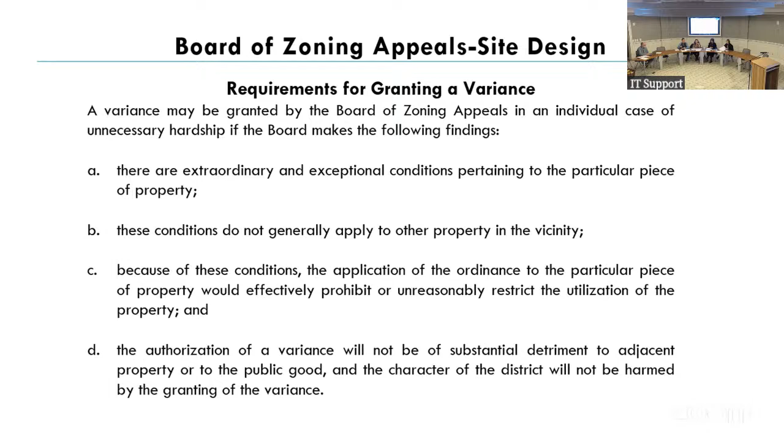So with that, we'll also mention that Amanda Barton has joined the meeting, so we now have our full quorum. We'll go to our first item, which is going to be item A1, review of the minutes for the September 4th. No, all right, sorry, November, wrong one there, I'm sorry. November 6th meeting. Any comments on that, or a motion for approval?

I make a motion for approval. Second. All right, so all in favor of approving the minutes from November 6th? Who seconded? Ruthie, you weren't present at the November 6th meeting, so I'll second. Yeah, so Amanda Barton. Okay, so all in favor? I'm in favor. In favor. In favor, so that passes 3-0.

And I believe we finally have our correct members here for the review of the minutes from February 7th. And I apologize, our admin snuck this one in because she has better memory than I do, so I don't have a slide prepared for that, but you have it in front of you. That's right, we know those minutes. So is there a motion on that?

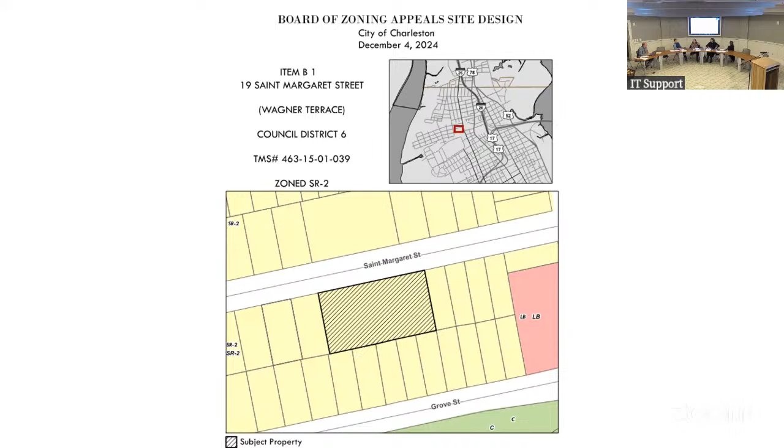This is what we would consider in an SR2 legal non-conforming situation. Obviously, it was the center for young women, and it's my understanding the building is going to be repurposed to a multi-family building, and it received Board of Zoning Appeals use variance to allow that to occur.

So here it is sitting on St. Margaret Street. As you know, it's a fairly large building with a little accessory structure to the west. Driveways to the east with a small parking area on the east side and a service area to the rear. This is just a street shot to remind you all if you haven't seen this structure in the past. Little brick seat wall raised.

So with the repurposing of the structure to multifamily, I'll let the applicant speak specifically on the number of units I think that the Board of Zoning Appeals permitted. They're going to have to park it.

So this shows an expanded parking area on the south side of the building and stretching to the west. As you can see, because it's less than an acre in size and zoned SR2, the ordinance is only going to protect the grand trees.

If the existing operators wanted to cut down non-grand trees, they would have the right to do so based on the base zoning. So we have 4, actually I think 5 grand trees, and number 8 and number 11 are the 2 that we'll be addressing tonight.

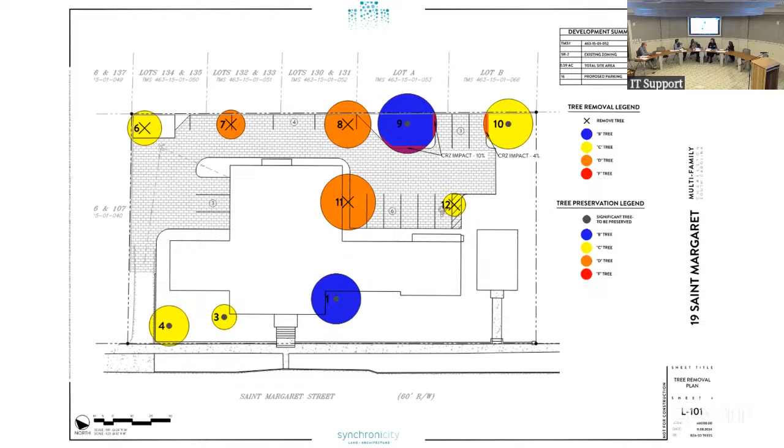I'm going to be able to work with the applicant and the project arborist. We've already studied reducing the aisle width, and with alternative construction methodologies we'll work to allow small encroachments.

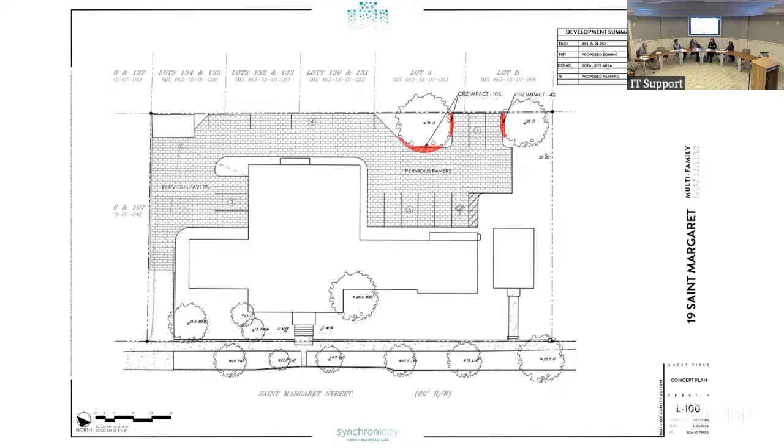So I did not require that to be advertised, but that just shows the 26 and the 31-inch oak, and there's a grand magnolia out front. Natural Directions created the initial tree evaluation report and is also carrying through some recommendations for the parking lot improvements.

So again, tree number 8 is a 24.5-inch willow oak, and tree 11 is a 14-15-inch live oak. Again, the plan for additional parking. So again, the 15-inch willow oak, grade D, that we can permit without board's approval.

But number 8, the 24.5-inch willow oak, grade D, and you'll see some photos that pertain to that. Included bark, small cavity, very strange branch connection.

And then the double stem live oak, I suspect is a volunteer. I don't think it was planted that close to the building. As you can see, there's the beginnings of maybe some structural damage to that brick foundation system. I think that portion of the building is on a slight crawl space. And then, of course, the crown that has been searching for sunlight stretched out.

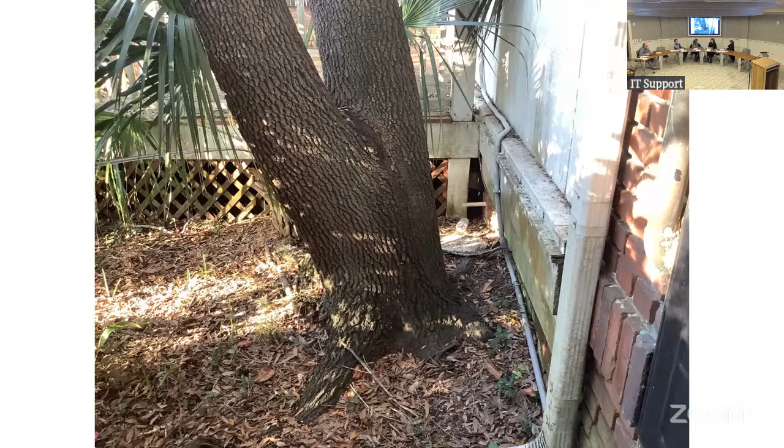So with that said, staff recommends approval with the conditions to plant 47 caliper inches of native canopy trees on the site. Obviously, we have large buildings, we have parking. We do have the opportunity, in my opinion, to plant 4 2.5-inch caliper trees and then make a contribution to the city street tree program in the amount of $4,130.

That's the remaining inches divided by the 2.5-inch tree that the city would buy and plant, at a cost of $295 per tree. Plus use a 4-foot chain link fence as tree protection barricades for the trees in the rear during the parking lot construction, installed by the project arborist. Must implement the certified arborist tree preservation plan, and then must submit a landscape plan for staff review and approval.

Excellent. Thank you, Eric. Is the applicant present? Yes, Mr. Chair.

Good evening. My name is Todd Richardson. I'm the landscape architect for the project, principal with Synchronicity at 69 Moore Street, Charleston, South Carolina.

So what we have for you tonight is an opportunity to help Florence Crittenton further their mission. They're in a very beautiful, but very historic and very much in need of building and site that not only does not meet their current program needs for the young mothers, but also is in need of a lot of repairs, and it's really going to become something that needs to be addressed. We're helping them set this up for the right group to come in and address this. This building will need several years of work, historic restoration and care. It is on the register, and SHPO will be involved. So there's a lot to be done after this.

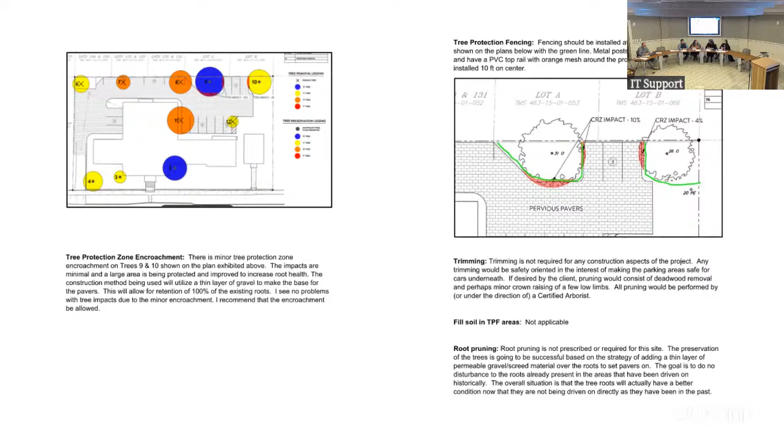I think it's a great mission. I think it's a great use of the property. We need small multifamily units. And I think it's a good solution. So I'm in favor of it.

Okay, I make a motion we move to approve the staff recommendation. Second. Who made the second? Paula? Yes, okay, so motion for approval of staff conditions, all in favor? Say aye. Aye. In favor, motion is approved 4-0.

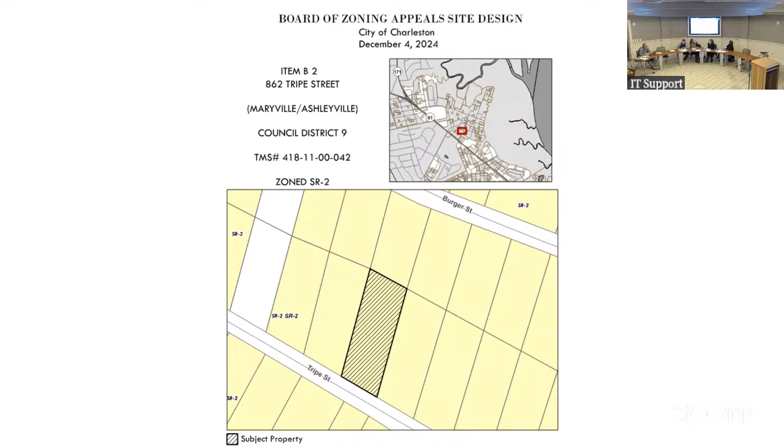862. You can see that it's a series of vacant lots. Couldn't tell you, there's a remnant driveway here and there, but I think I came across an old well of some sort, but they've been vacant for quite some time, overgrown.

We have large trees, some grand, some not classified as grand. You can see some very large sweet gum. The live oak that's in question is that small mound-ish looking tree in the center there, and you'll take a better look at it here in just a moment.

So the survey is this existing condition survey. They actually labeled it as a triple live oak. It's the one closest midway to the property line there. A very large red oak to the rear.

The site plan is to propose or build a house forward of the large red oak. However, this tree being the shape it is in, and/or the crown size, and then also you'll see in a moment the severe lean that it has. The third stem is a water oak, so I just circled that there to give you an idea. The parking would be out front, the house forward, very large rear yard.

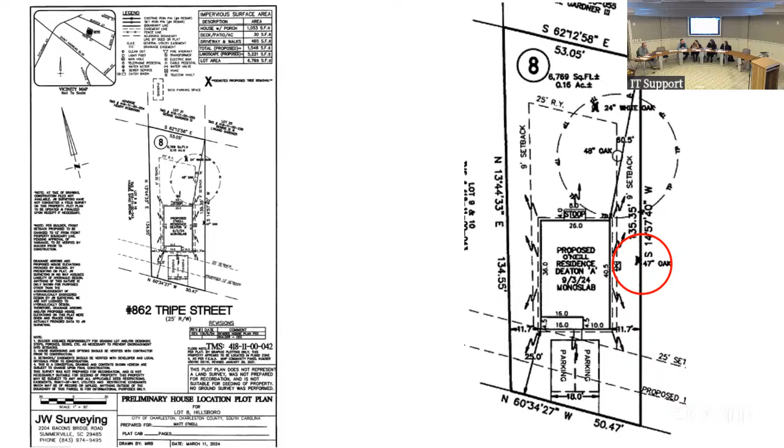Eric, what did you grade the tree? I would call it a D, with the double stem and the severe lean. The other oak is coming out of it. Right.

Just want to make sure. The first picture, standing back at the site, kind of says it all, with this little mound. If you were even to look and say, how do we trim back to be able to locate a structure on the property, all the major limbs are going toward where the house footprint would be.

Well, I'm happy that the red oak is staying for a change. Yeah, and it seems that the concept is to maybe maintain the other trees, so.

And those other two lots aren't going to come back with any removals, correct? I saw a house under construction to the left of this one and there were no trees on it. I own the lot to the right, at 860, and only the gums are going to be removed on that.

No trees are required to be removed. I like trees. I know another group bought the property to the left, but I'm not certain what they're doing. Yeah, there's a foundation going. Thank you.

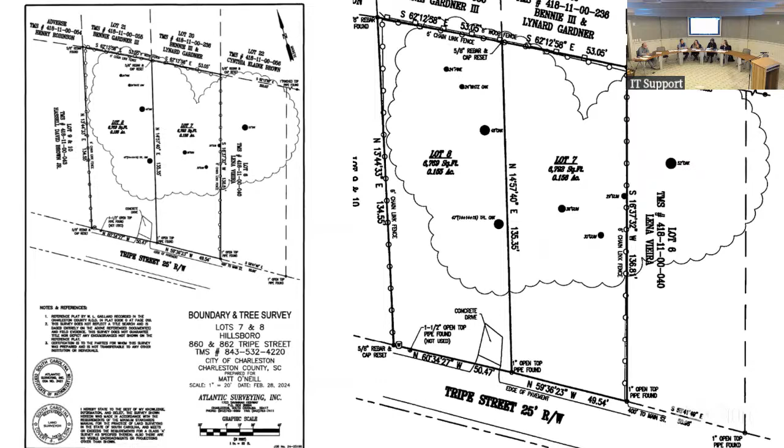I think it's a reasonable request. It's not some giant house being squeezed onto a tiny lot and clear cut. It's realistic.

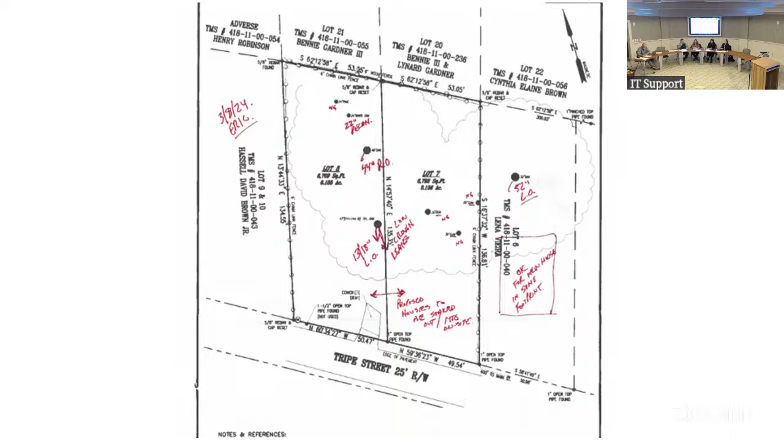I move to approve with staff recommendations. Second to the motion. Motion for approval with staff conditions by Ruthie, seconded by Amanda. All in favor? Aye. Motion is approved 4-0. Thank you for your time.

Our next item would be item B3, 84 Barre Street, TMS 457-02-04-001, zoned LB. Request for variance from section 54-327 to allow the removal of one protected tree.

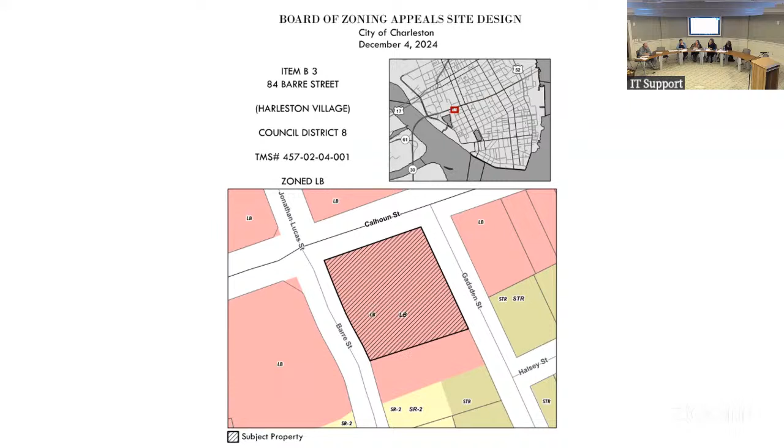West side of Calhoun Street, 84 Barre is the address. 76 Barre is the existing Ronald McDonald House facility. For justification, MUSC is planning to expand the Ronald McDonald House to provide more housing for patients, families, and others. You can see the lot line configuration today.

However, the county is going to— oh, here's the sole tree. There are palm trees, which can be easily relocated, but the sole live oak is there. There's a picture of it from the street survey. They use this lot today as valet parking.

So the county is in the design phase of enhancing the Courtney Calhoun Street corridor section, and it's going to move this far east. They're taking some of the existing MUSC lands to adjust the curb and help out with that southern lane on Calhoun Street. So they're getting pinched by some land taking, if you will. They're going to provide parking as much as they can on site.

And then the building is actually bridged. It's physically connected by a first floor, or a second floor I guess—first being ground, second floor bridge. So you can see the location of the tree is basically on the foundation. I believe that's where the bridge ties in right there too on the second floor.

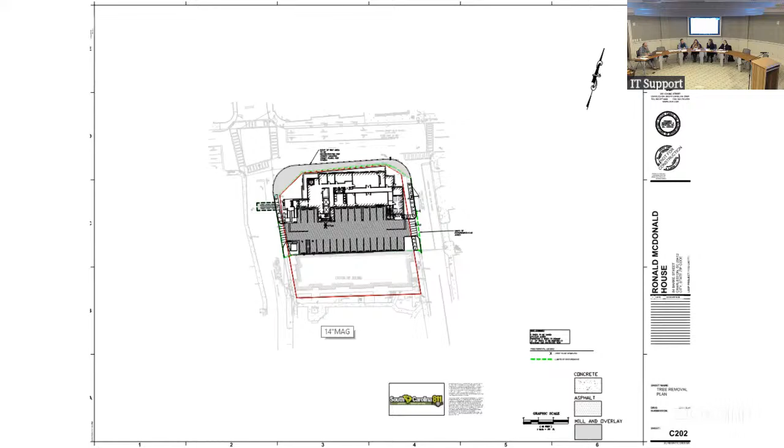So just to remind you, it's a surface parking lot today. Okay, thank you, that's helpful. So they'll have a building out on Calhoun Street, physically connected by a pedestrian bridge above the parking. Got it, okay, thank you. And so the parking that they can't fit on site now will just go across the way to the parking garage, I guess? That's correct—MUSC has a whole parking program and management division.

I think that the acquisition, the changing of the right of way, whatever it was—I think that's our hardship. And I would agree with that. And it's too big—well, I mean, technically the tree could be moved, but this is a nonprofit as such, so I think it's unreasonable to ask that. Yes, I make a motion to move to approve the staff recommendations.

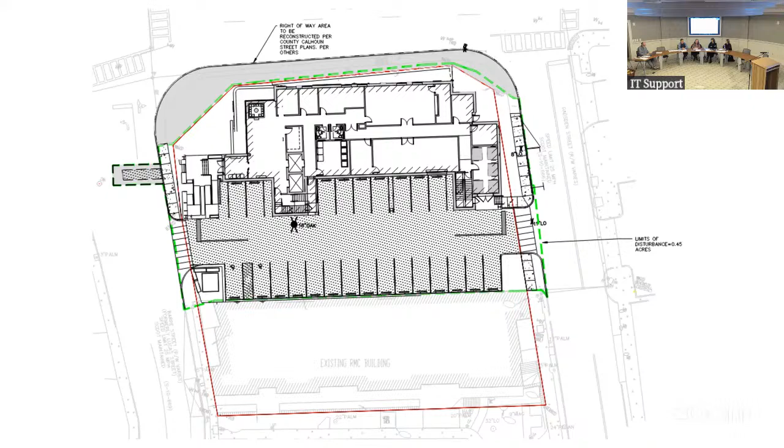Second. All right, so the motion's for approval with staff conditions by Amanda, seconded by Paula. All in favor? Aye. Any opposed? That motion's approved 4-0 as well. Thank you.

Okay, we'll go to item B4, which is 2205 Daniel Island Drive, TMS 275-11-02-001, zoned DIR. This is a request for a variance from section 54-327 to allow the removal of one grand tree. I believe we have a representative here; the owner is out of the country.

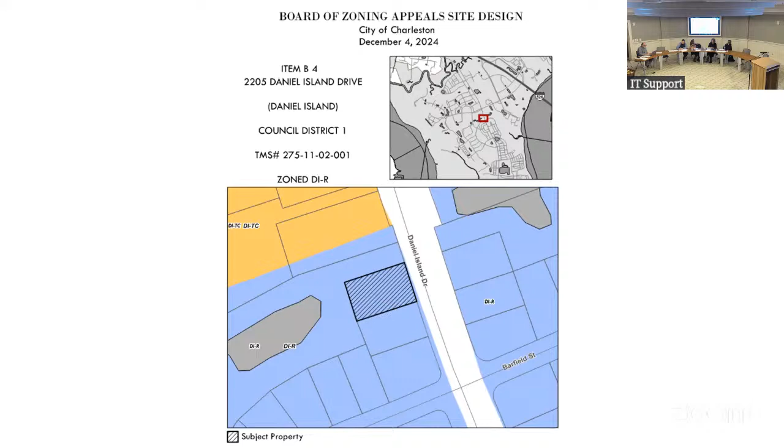This lot and the approval for this house goes back to 2005, you'll see those documents in just a second. It's next to a green space. Note the open backyard that abuts the open space, and a right-hand panel of lawn space to the right of the front walk. Keep that in the back of your head, I'll reference it in a minute.

Through the tree inspection request form, staff received that request. I get assigned the 29492 zip code, so I handle Daniel Island. I approached this tree and measured it three times: 24.1 inches. This tree was planted, it was not worked around, so almost nearly 18 or 19 years old.

The issue is, this is a photo provided by the applicant. You can see the whole driveway is heaved and cracked in front of the garage doors. Here's the plat of the property that the owner provided.

Here are the ARB approvals, July 9, 2005. At one point it was tire runners, and then I guess they came back for a reapproval to do larger, more concrete. And obviously the tree was planted.

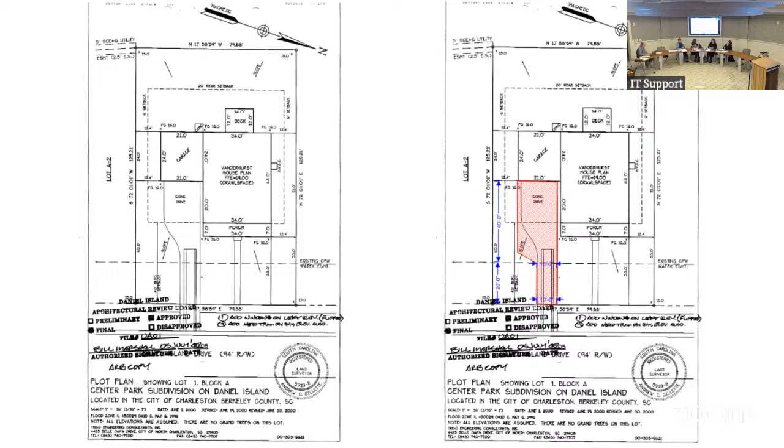But then he was like, I don't know, Eric, I just don't have a good feeling about this. So I said, well, have them air spade the entire root system, and you can see the extent of the roots that went under the drive. It's quite amazing, toward the garage, toward the house.

And to have water drain away from the garage, I suggested maybe we cheat and do a reinforced concrete, 3.5-inch, typically it's 4-inch, but even then the roots are just so incredibly all over the place.

There's a little small crack in that pier right here. I don't know if it's due to a specific root or what have you.

So in the interim, they had bought the house and were doing renovations. They said, we've got to do something. I said, I can't do a staff-level approval. So they laid down some rock in there just to keep it from washing out, what have you.

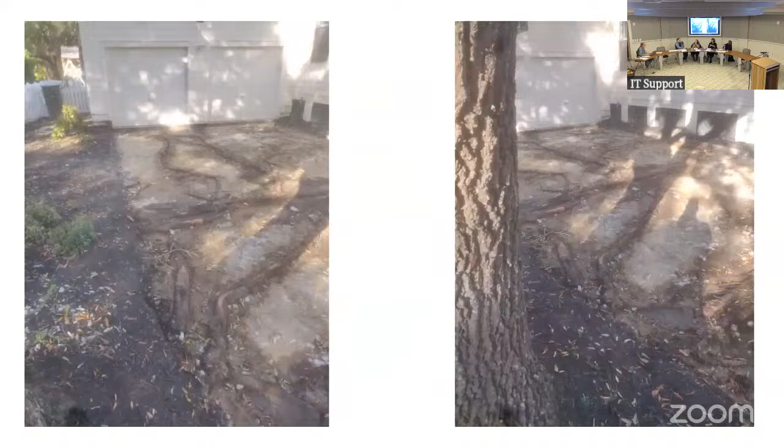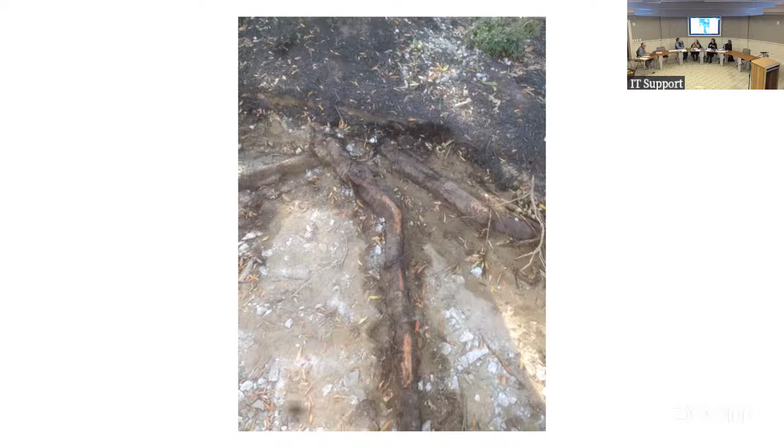Again, it's just a massive amount of roots in that zone to reform and pour a concrete drive. I asked that they spray paint them; that didn't quite work, but you can get an idea of the amount that headed that way. This is a recent picture where they just had to put some rock down to make it livable for guests, I guess, during the holidays.

Contemplating that, knowing that the tree was planted, I'm recommending approval to plant two 2.5-inch caliper trees, one in the front yard and one in the back, to be planted by March 1 during this growing season, and to make a contribution to the city street tree program in the amount of $590.

All right, thank you, Eric. Is the applicant present, or his representative? He's with us. Okay, okay.

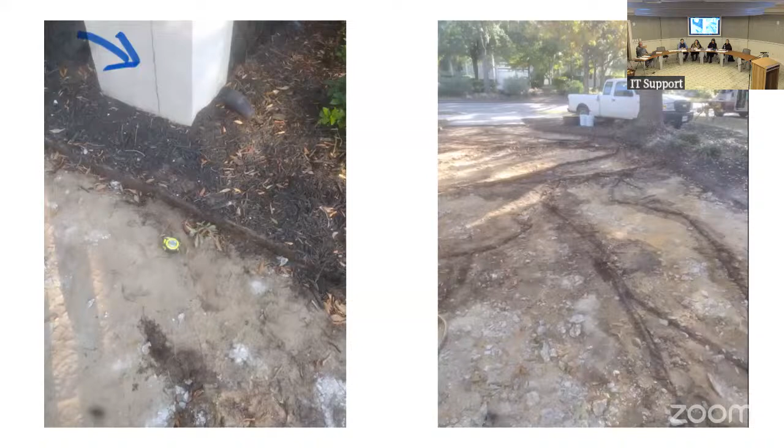I think you laid it out pretty quick, the tree roots are pretty massive. They had actually... State your name. My name is Forrest Bond. I live at 212 Birch Lane in Summerville.

The tree roots had pushed the driveway up so much that water was literally shedding back towards the garage. We were worried it was actually going to start flooding it. We had the arborists come out to look at pruning the roots and shaving them down. Due to their proximity to the trunk, if too much was cut back it would kill the tree. That's what I was told by Peter.

We like his recommendations of being able to remove it and plant other trees on the property. The tree was, I guess, planted when the house was built back in 2001.

Let me know if you have any other questions. Anybody else present that's in favor? Anybody present that's opposed? Closed application to the public. It's open to the board for questions or discussion.

Those seem like really super surface roots for a live oak. I was super weird, surprised when they used an air spade and exposed everything. When it first started, you couldn't tell the extent.

I could see some roots leaving the mulch interface, but wow, again, the irrigation and how soon that concrete got pushed up and then cracked and then water pooled. I have no idea, but really amazing. What's the soil like in that section?

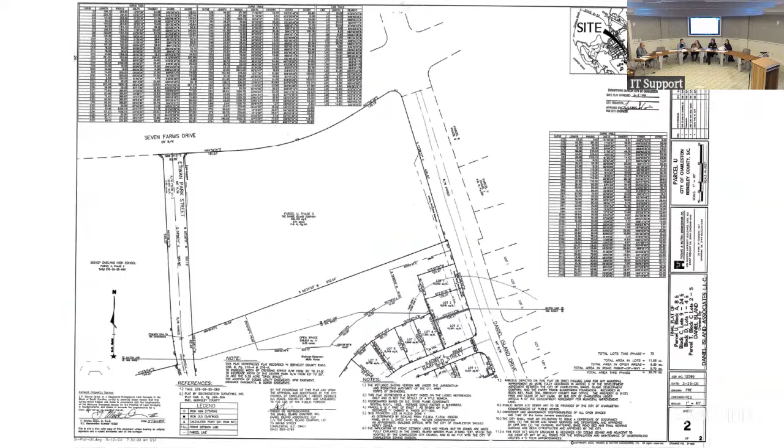I couldn't tell you. I really couldn't tell you. It just seems a little weird when they built the pond, there was probably very little of this section of bad soil.

Daniel Island Drive actually was cornfield. When you make the right to Bishop England, you pretty much went into row crop. But with the construction of the pond and tossing soil every which way, who knows whether a clay layer got in there, but yeah, I was shocked. That's what it looks like. I was shocked.

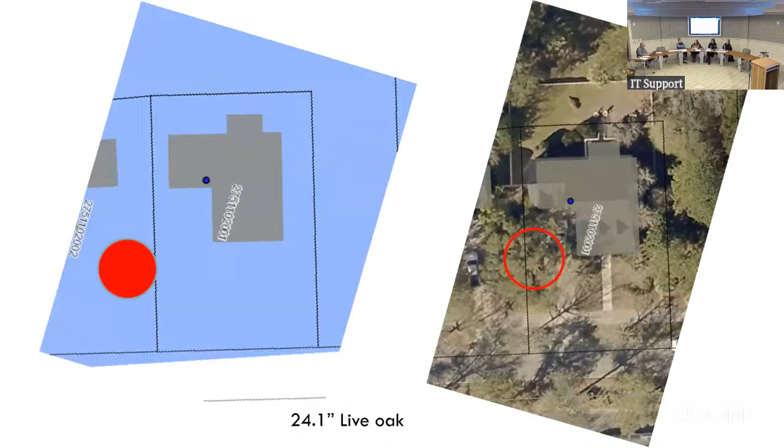Just stays, yeah. Does anyone know if the applicant has spoken with the neighbor next door? I don't know that. The house directly to the left of it just had a new resident move in, it was for sale. Peter hasn't been in town since they moved in. They just moved in maybe 30 days ago.

I don't see any way to save the tree. Well, and did Daniel Island weigh in on this? They'll have to go through the ARB. So after we do it, it goes through their area. It looks really thin on the crown too. Sure does.

And you said 2 native trees, right? 2 native trees, one in the backyard, which is open, one on the right of the front walk, I think, has a nice little lawn panel.

Move to approve with staff recommendations. Okay, is there a second? I'll second.

Motion for approval by Ruthie, second by Amanda. All in favor of that motion, say aye. Aye in favor. Any opposed? I'm gonna abstain. All right, 3 and 1 abstention. So it's approved. Thank you for that.

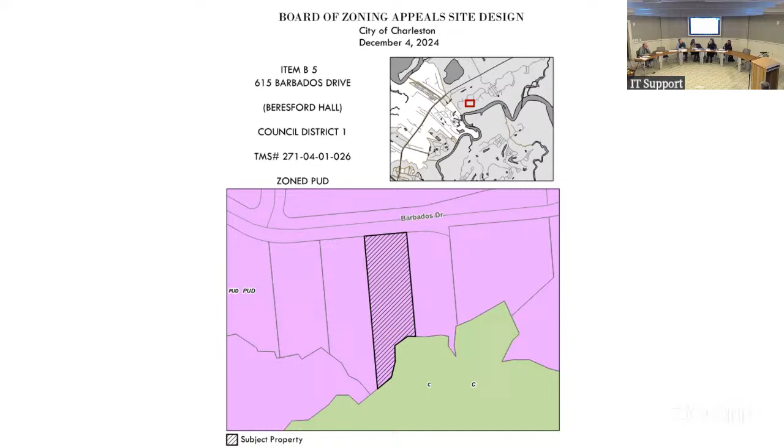This is the application. Phil Clark Design is the architect. It's a lot that fronts on Beresford Creek off of Barbados. The dock is in place. There is some topography, it drops. Trees. You can see the vacant lot between existing homes.

So multiple grand trees on the property, live oak, red oak, primarily live oak. One is an F grade, top is blown out. The tree in question is kind of centrally located.

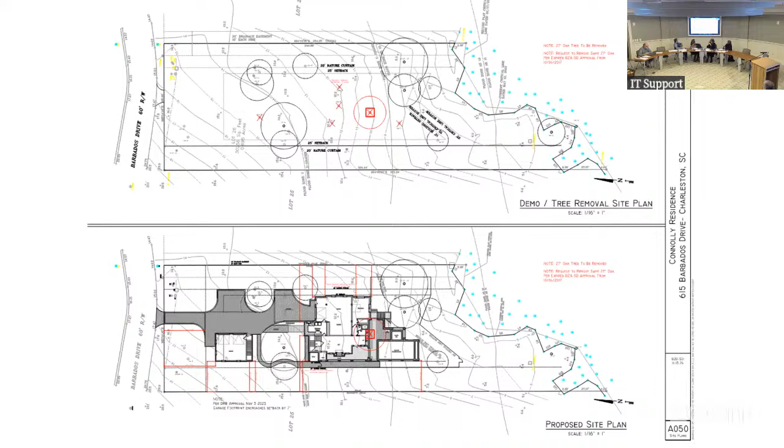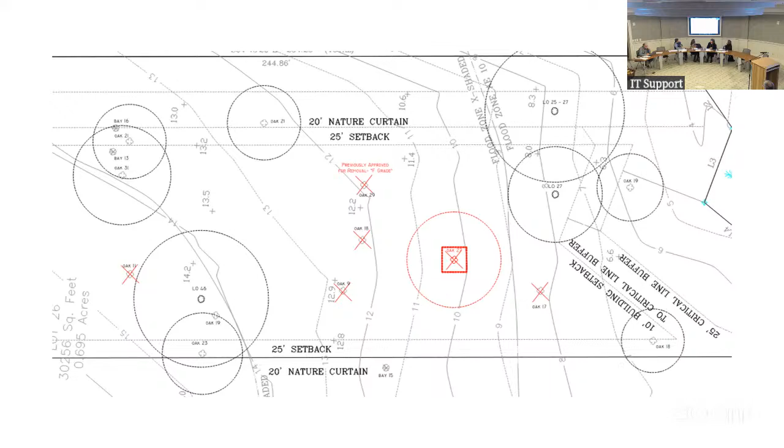This is a zoom in of the house. We do have encroachments. We approved and worked with the consulting arborist last time in 2017, so I'm prepared to work again with the encroachments.

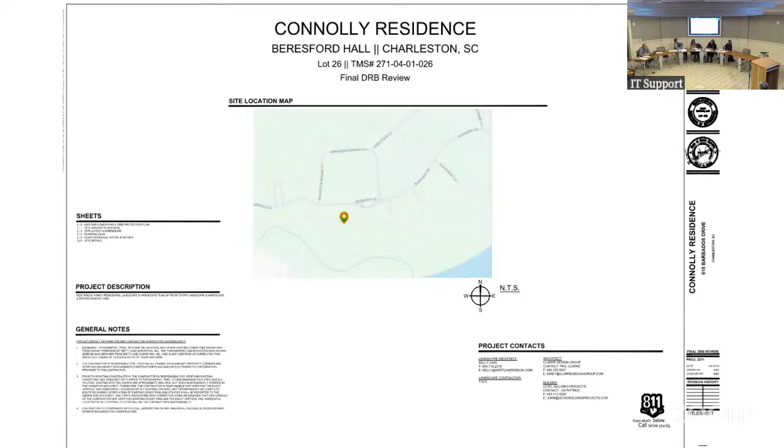So here are the plans more in detail. Tree protection barricade plan, silt fence, nature curtain protection.

Grading plan. Landscape plan.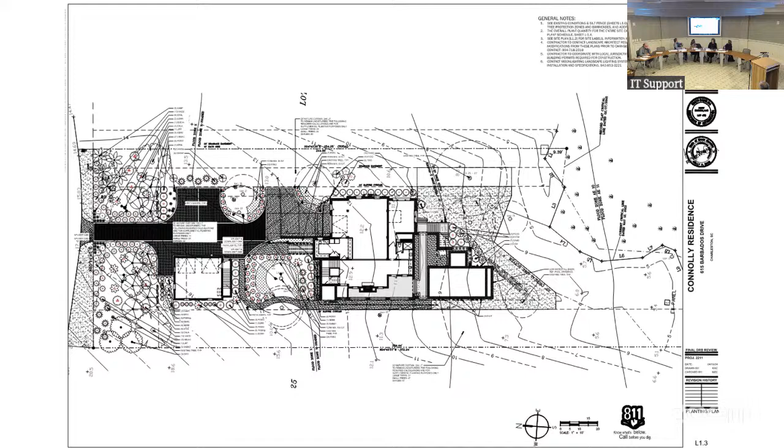So this was the 10/4/17 approval, same tree. Del Pastel, Jeff Webb at the time.

Mr. P.O. Mead's letter on the specific tree in question, a 27-inch live oak, noted some branch breakouts, some branch failures, and an unbalanced crown.

So staff is going to remain in support of the removal of the 27-inch live oak, with the condition to plant 27 caliper inches of native canopy trees on the project site in the form of five 2.5-inch caliper trees, and a contribution to the city street tree program in the amount of $1,475.

Must use a 4-foot chain link fence as tree protection barricades, to be installed by the project arborist. Must have the project arborist treat, prune, and supervise any activity done in the tree protection zones of the grand trees to remain on site.

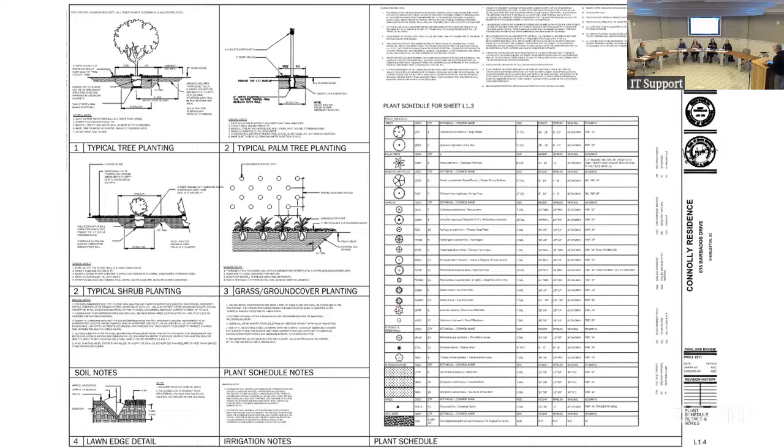Hey, Phil Clark, Park Design Group, 1100 Palm. We've been working on this design for about two years, and here with the owner, Duffy Connolly.

When we first looked at this, we had the paperwork from the previous removal, and we reached out to Eric along with PO at that time as soon as we started, and reevaluated all the trees and determined that the tree originally allowed to be removed worked out the best. We were able to fit the house in amongst all the other trees, and it seems to work out really well. So we just wanted to follow the same thing.

We have a grading plan. All the conditions, as Eric mentioned, are fine, and we will certainly follow those. So thank you. Excellent, thank you.

And anybody else present that's in favor would like to be heard? Anybody opposed? Close the application to the public.

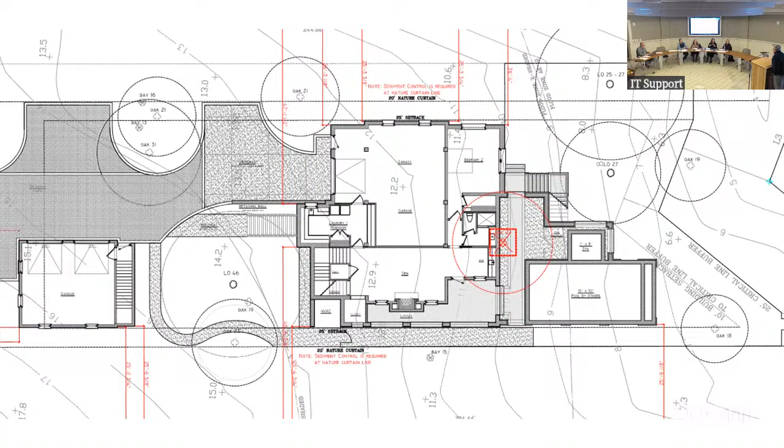So who is Nest? That's Nest Landscape, that's the architects? Landscape architect. Her name's Kelly Kane. She used to work with Remark, and she's been out on her own for about three years. Okay, yeah, nice lady.

I remember the conversations before about the number of trees being saved on the front end, with the house being nestled back. And the critical line setback takes a good chunk out of that backyard, but it leaves a nice growth back there.

This one was pretty cut and dry. Definitely no precedent.

If there are any other questions, does anybody have a motion? Well, typically, if something's pre-approved, we tend to hold up the motion. So I guess what happened last time is somebody else was going to buy the lot, they came in with their design, we approved the removals. Then that changed, somebody along the way built the dock while waiting to build, and now they're back with a house design.

That's correct, better houses. Whatever the transactions, nobody requested an extension. Typically we ask that that approval from 2017 be matched with an extension, but they went out and reevaluated the trees, with a similar size house nestled in the same location. So basically, a new plan.

I'll make a motion for approval with staff recommendations. Is there a second on that? I'll second. All right, so motion for approval by Paula, seconded by Amanda, all in favor? Aye. Aye. In favor, any opposed? Approved 4-0. Thank you, y'all have a good evening.

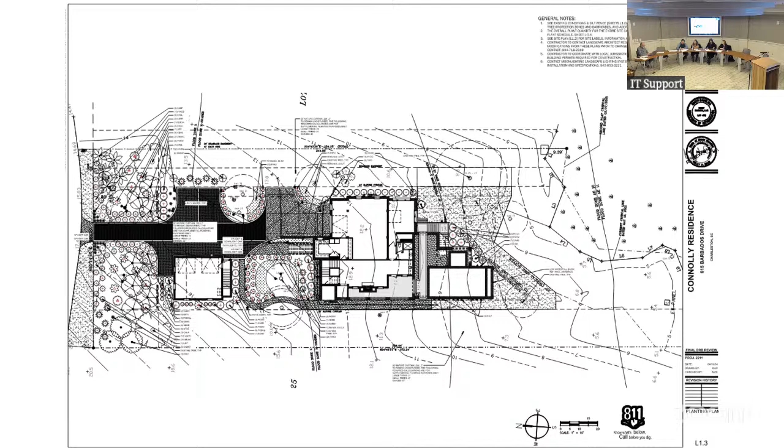Finally, yes. It only took us a year. But you know what's weird is I can swear we've all been here at other meetings. Yeah.